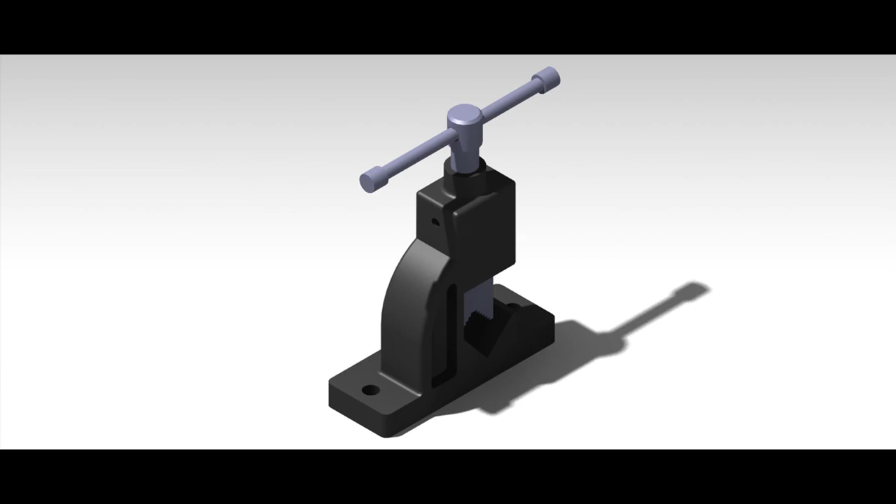In this tutorial, assembly of pipe vise using CATIA V5 will be demonstrated. We are going to assemble the components of pipe vise which are already created.

Let us import the base of the pipe vise using the existing components tool. Now let us use the Fix Component tool to fix the base.

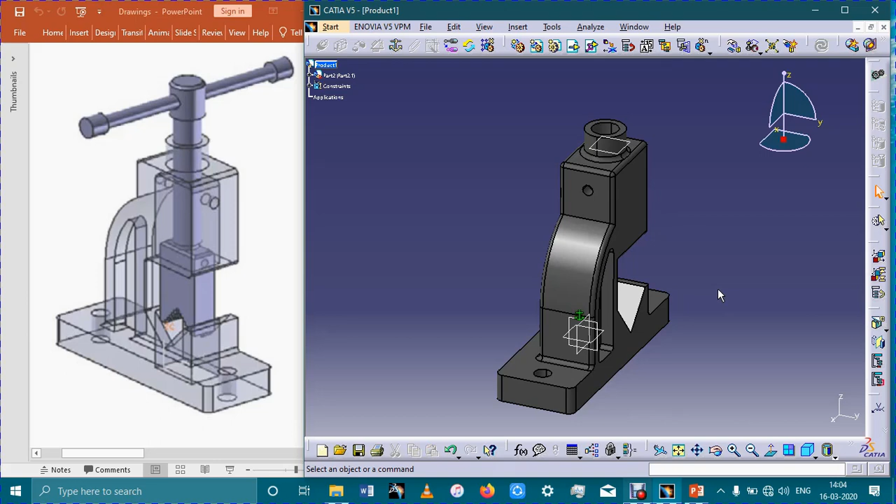We shall import the screw and movable jaw parts. Now, using the manipulation tool, let us move the imported parts away from the base.

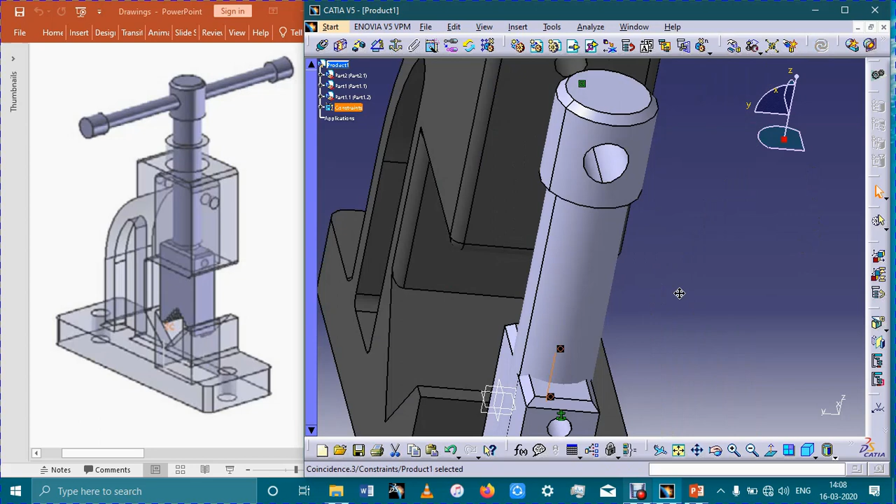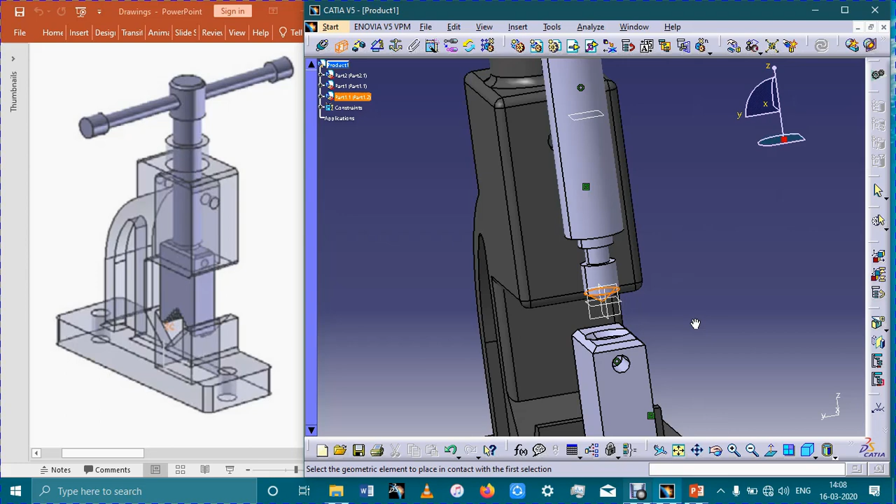Let us use the coincidence tool to coincide the axis of the screw and movable jaw. Then we shall use the surface contact tool between the screw and movable jaw as per the drawing. Again, use the same tool to make surface contact between the base and the movable jaw.

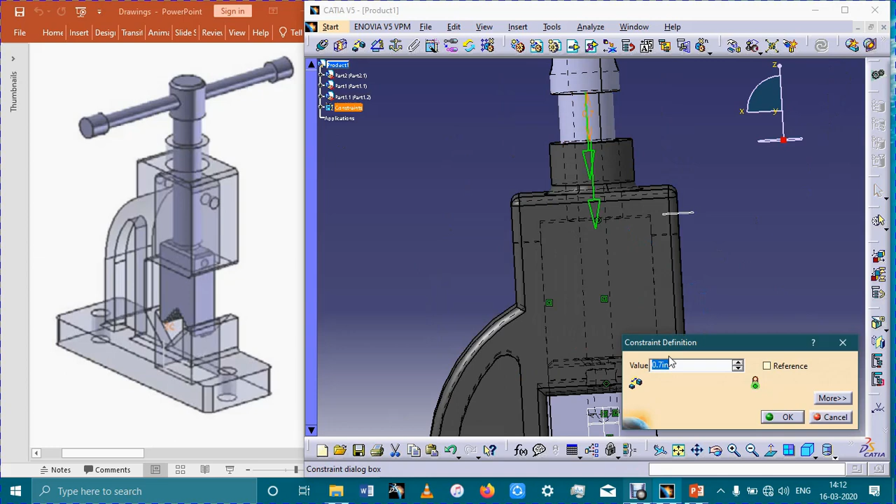Then use the Offset tool to create the gap between the base and the movable jaw.

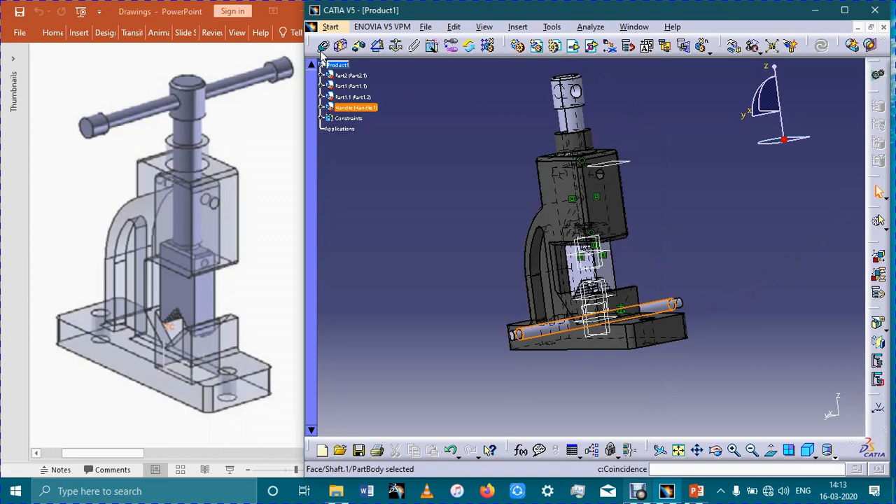Further, we shall import the handle and handle screw parts. Let us use the coincidence tool to coincide the axis of the handle and handle screw.

Then use the surface contact tool between the handle and handle screw as per the drawing.

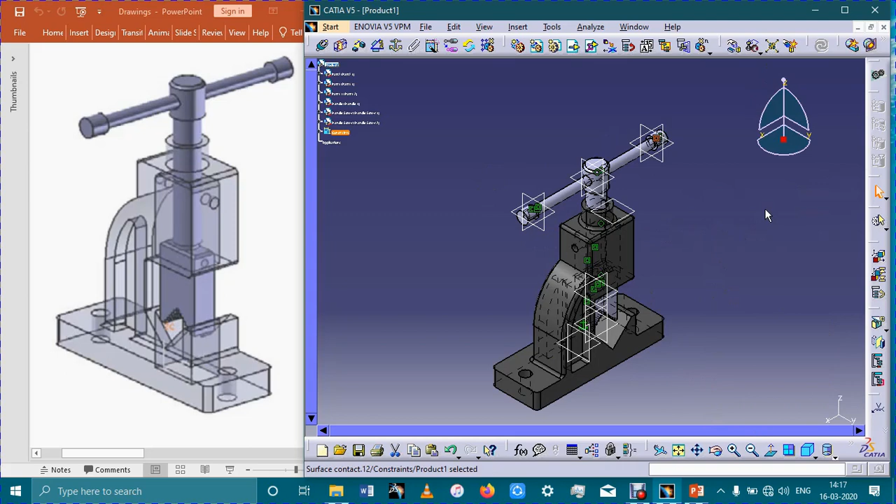Now we can save the pipe vise assembly.